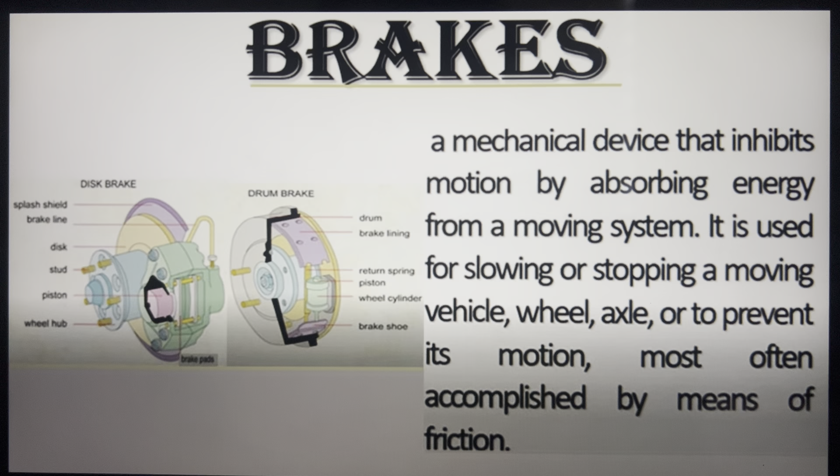Ang brakes po ay mechanical device that absorbs the energy from a moving system. It slows or stops the moving, it can be the wheel, the vehicle, to prevent the motion. Brakes are under friction po. So maraming uri ng brakes, we have the differential, we have the band brake.

Okay, pero for today, mag-solve po tayo ng problem about the band brake. Sa brakes po, concept-wise, sa band brakes, purely mechanics po yung solution natin. So kailangan lang po ma-drawing muna natin to.

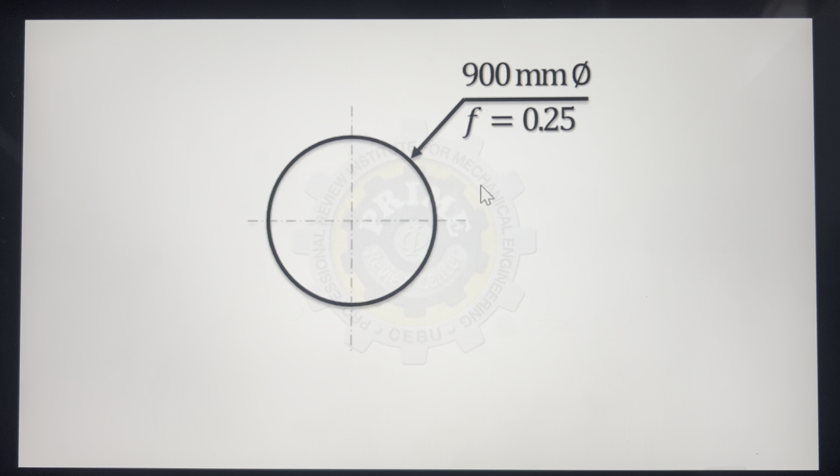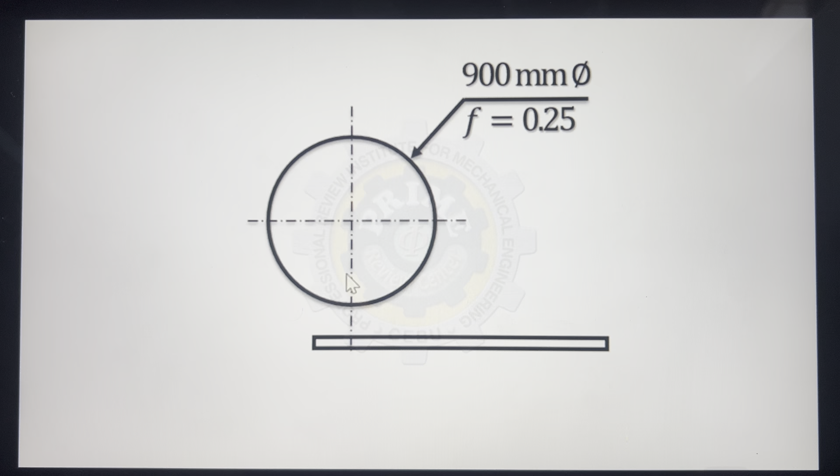Okay, kailangan po natin drawing, no? So, you have your band brake, sabi 900 millimeters diameter, and coefficient of friction is 0.25. Sabi, there is a straight brake arm, placed daw siya perpendicular to a diameter. So, ito yung diameter na pinili natin. It should be perpendicular. And this diameter daw is bisecting the angle of contact. Perpendicular and bisecting. So, hinati niya sa dalawa yung angle of contact.

So, alam natin, ang mga band brake, pag yan po ay bibitaw sa drum, naka-perpendicular po yan. So, the angle of contact, sabi, is 1.5 pi radian. So, if you convert that into degrees, that is 270 degrees.

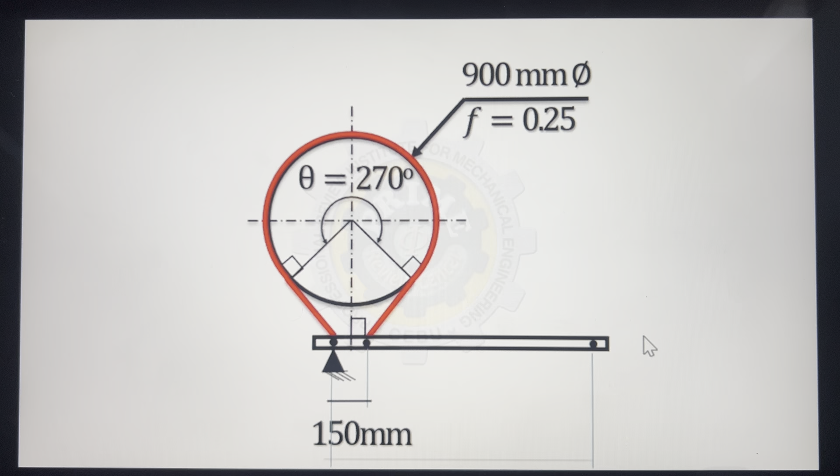Okay, bago po bumitaw ang brake sa ating drum, naka-perpendicular po yan. Okay, so sabi, one is fastened to the fixed end and the other is at 150 millimeters from the fixed end. And of course, nandito yung ating force, which is 1,000 millimeters yung haba ng straight brake arm. Dito mo po yan itutulak pababa.

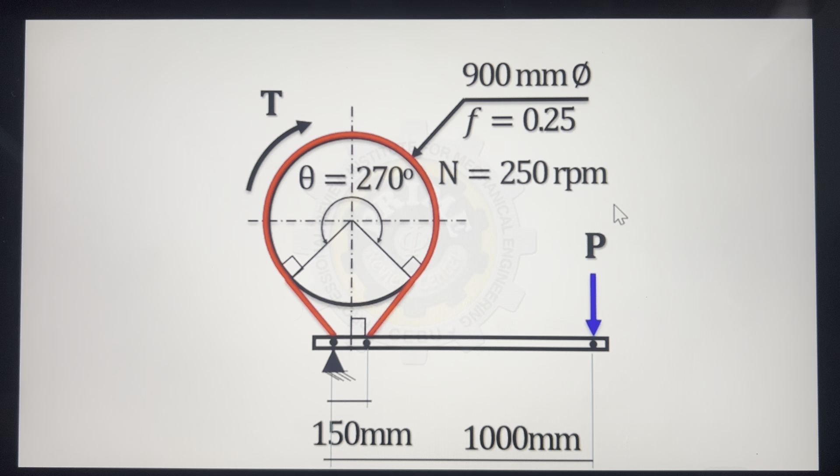So imagine, pag pinulot mo yung pababa, pupulupot yung band sa drum, titigil yung drum. So, assuming that the drum is rotating, wala kasing sinabi, so let's assume it is rotating clockwise, having a speed of 250 RPM, you're asked to solve for the force required. Tawagin natin P. Note, kailangan may power. So, ang power natin, hindi na ibigay, pero it should be 50 kilowatts.

Okay, may power po yan, hindi lang na i-type, 50 kilowatts. So now, after drawing this setup, mabilis-bilis na po yan. Sabi ko, the solution under brake is purely mechanics. So, una, katay-katayin muna natin. By the way, kung papansinin natin tong gitna, so if this is 270, since yan ay 1 revolution, 360, ang matitira po ay 90.

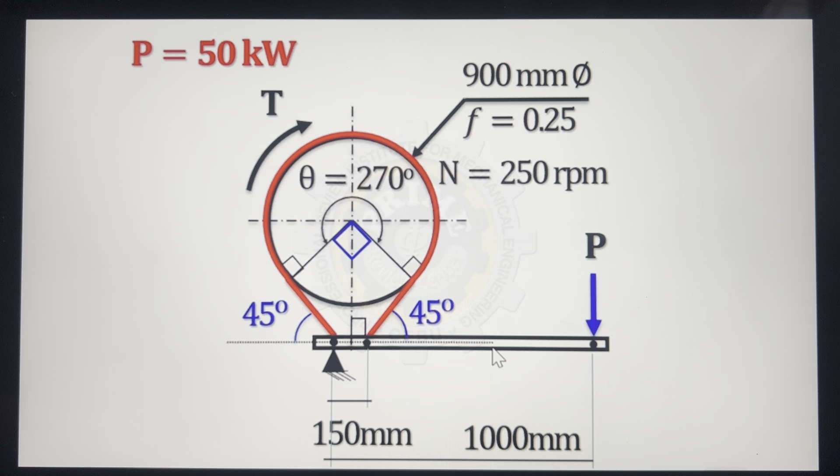Okay, so 90 yan. Take note, 90 to, meaning to say, ang dalawang gilid na ito ay tig 45 degrees. So, yan po yan, yung angle ng ating band brake with respect to the brake arm. Okay, so now, kakatay-katayin ko, free body diagram muna tayo ng drum.

This is the drum, this is the brake. Of course, kung ginawa natin siyang rotation is clockwise, yung nahihila po, that is your tight side, yun yung mahigpit, that is F1. Tapos yung bumibitaw is your slack side, yung maluwag, that is F2.

Okay, so now, if I take the summation of moment sa gitna, it should be 0 to maintain equilibrium. So lahat ng clockwise equals to counterclockwise. Clockwise na nakikita mo dyan is of course F2. Pag umikot siya with respect sa gitna, clockwise, having a perpendicular distance of radius, so that is diameter of the drum over 2. May clockwise pa po ba? Of course, the torque. Okay, Varignon's theorem, same yan ang effect sa gitna. So, plus torque.

And equal yan sa counterclockwise, which is F1 multiplied by the moment arm perpendicular distance, which happens to be the radius also, so diameter over 2. So pag sinimplify po natin yan, ito po lagi ang equation 1 sa band brake. Equation 1 for band brake is always F1 minus F2, that is the net belt pull or band pull, equals to twice of the torque over the diameter of the drum.

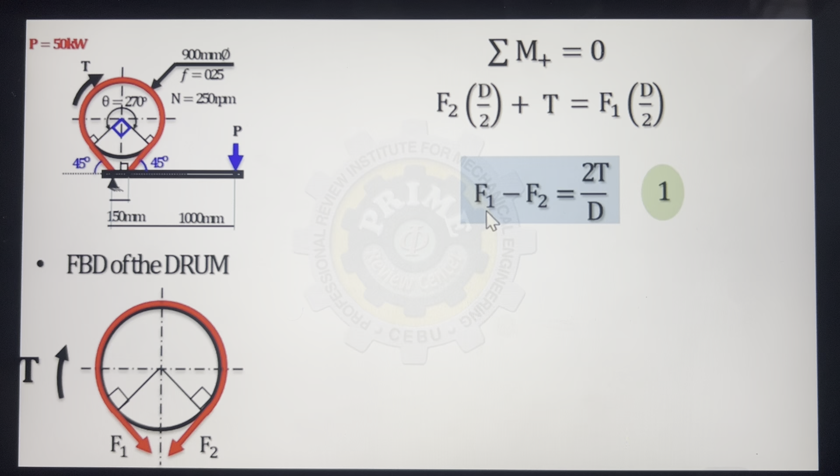Okay, so dalawa yung unknown mo dyan. You have F1 and F2. Yung torque mo, makukuha mo sa formula natin sa strength na power is Tn over factor. So kung kukunin natin yan, sa calcu natin, check lang natin.

So your power is 50 kilowatts. That is, SI is equal to torque. Gawin nating X kasi unknown. X, Tn, your N is RPM, 250. Kung naalala pa natin, ang factor natin sa SI ay 9.549 times 10 to the 6. Shift solve ka lang.

Okay, na-complex pala tayo, no? Ulitin ko lang. So, that is power, 50 kilowatts is equivalent to X, ang ating torque, unknown, times angular speed of 250, divided by factor of 9.549 times 10 to the 6. Shift solve for X, makukuha mo na 1,909,800 Newton millimeter po ang default ng ating torque sa SI.

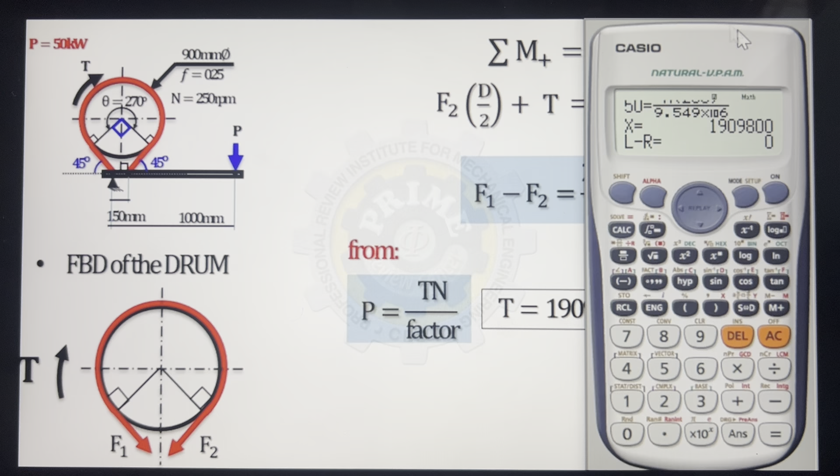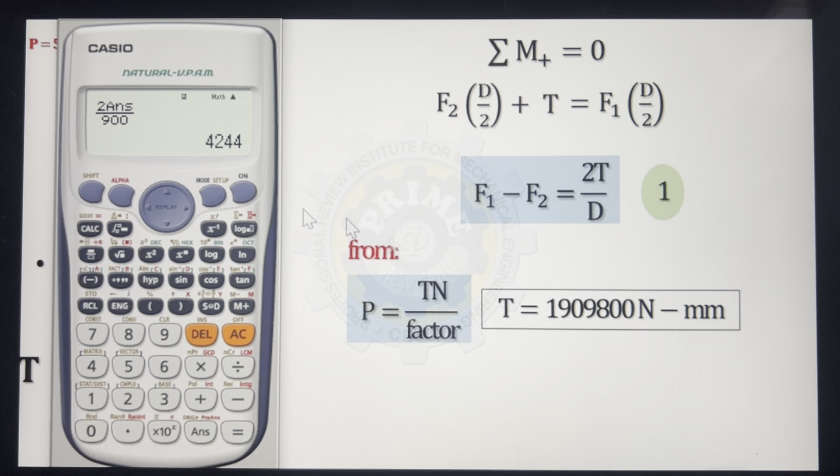Okay? So now, isa-substitute mo dito, makukuha natin ang ating value ng F1 minus F2, that is twice of the torque, which is nasa answer pa ng calcu, over diameter of the drum given to be 900 mm, ang matitira pong unit dun ay Newton. 4244. So, your equation 1 is F1 minus F2 is 4244 newtons.

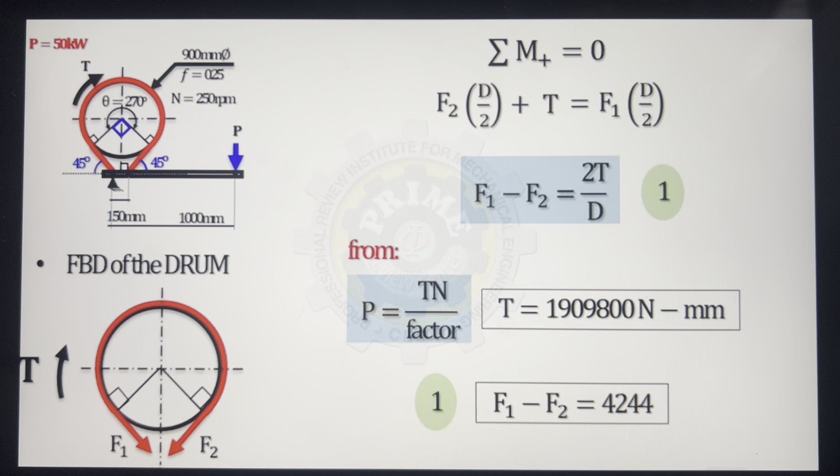Okay? So, dalawa yung unknowns. You have F1, you have F2. So, we need one more equation. Sa band brake, tandaan, ito lagi ang equation 1. Ang equation 2 natin, laging kukunin sa belt tension ratio na tinuro sa strength of materials, na F1 over F2, tight over slack, is equal to E raised to F theta. Coefficient of friction, theta is in radian.

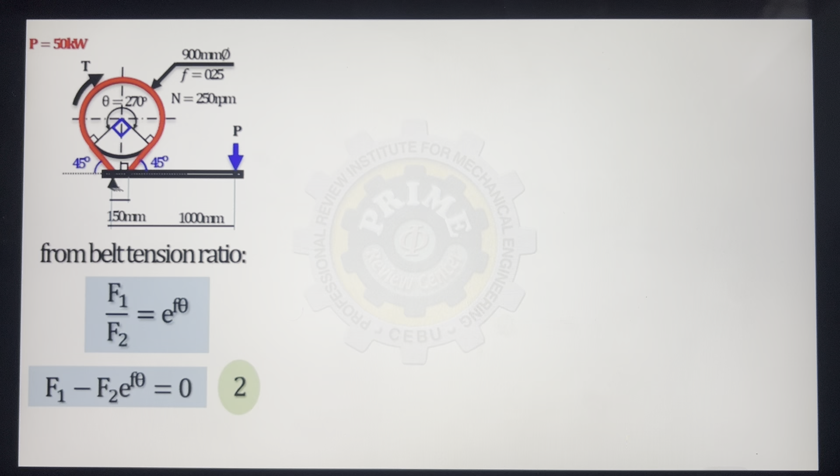Okay? So, cross-multiply mo lang. Cross-multiply doon, then transpose, magiging F1 minus F2 times E raised to F theta is equal to 0. Equation 2 yan. So, substitute na lang natin. Labas ko ulit si calcu kung saan galing yung coefficient ng F2.

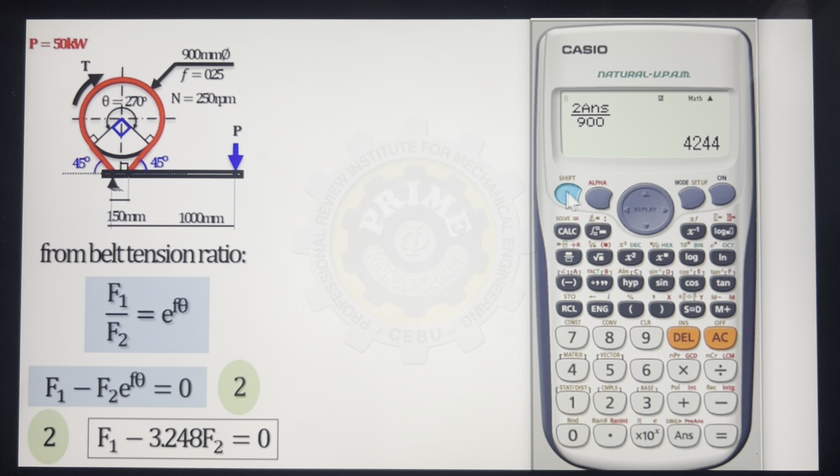So, that is E raised to F, which is 0.25. And theta in radian dapat is, sabi doon ay 1.5 pi. Okay? Equals mo 3.248. Okay? Doon po galing.

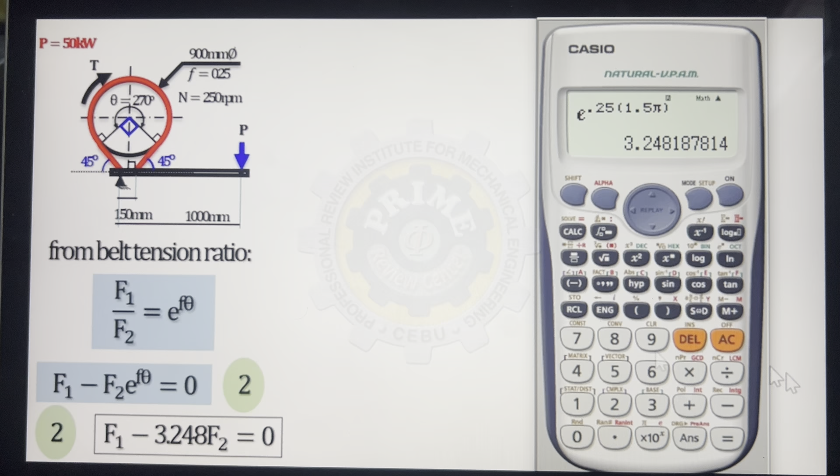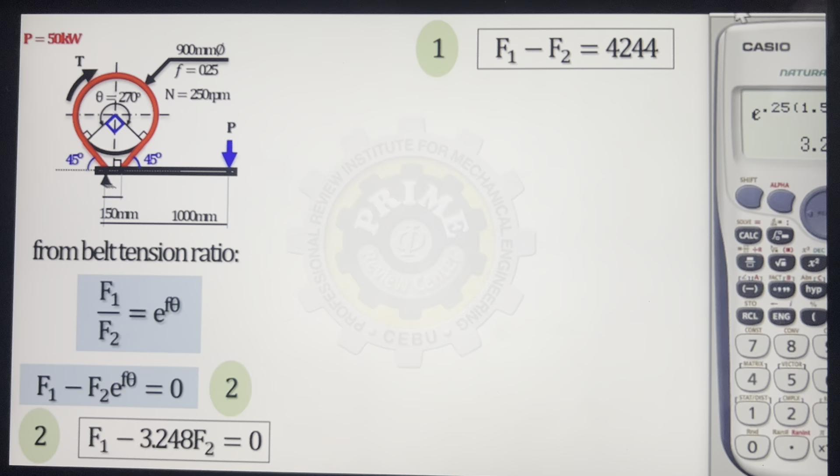So, now, solving equation 1 and equation 2 simultaneously, sa calcu po natin yon. Okay, labas ko lang ulit. Sa calcu natin, lagay lang natin ay mode. Two equations, two unknowns is 5, 1. So, ang ating equation na ay 1, negative 1, and ilan nga ba yun? 4, 2, 4, 4. Equals mo.

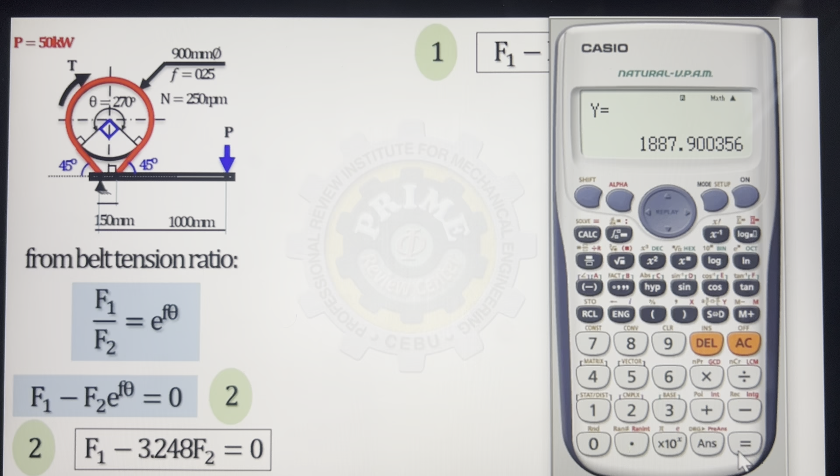Yung isa ay 1, negative 3.248 equals, and then 0. So, lalabas po F1 6132 approximately, and F2 is 1888. Yan po ang values ng F1 and F2.

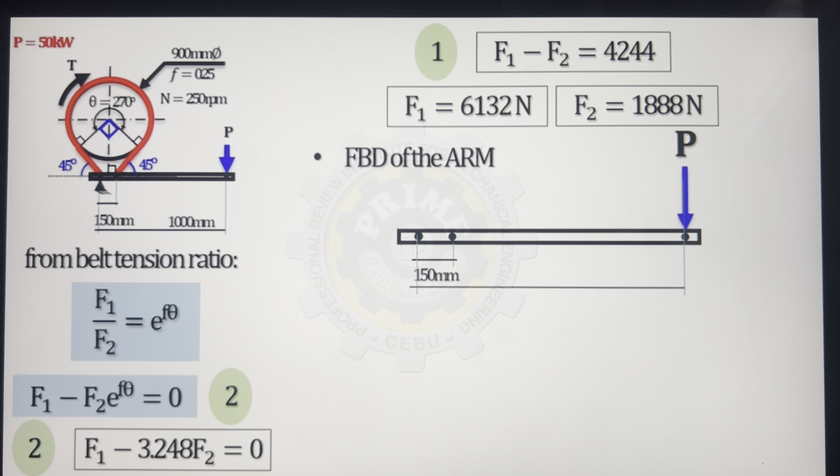Pero sa problem natin, hindi yun ang tinatanong. Ang tinatanong ay force P. So now, analyze natin ang free body diagram ng arm. So you have the two ends 150 millimeters apart, and you have your force P 1000 millimeters from the fixed end. So this is your F1 and this is your F2. Lagi po natin gagamitin references yung fixed, which is at F1. So tatawagin ko yung point O. Then we take the summation of moment at point O to be 0.

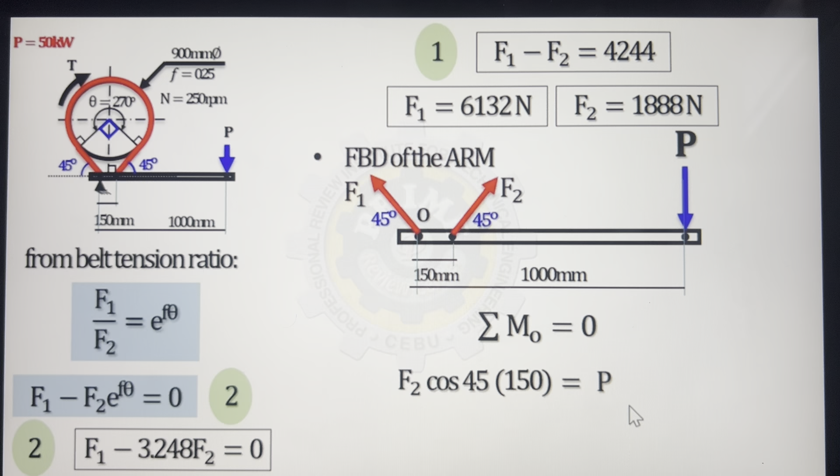So syempre, hatiin mo sa component sa F2, hindi na magkakaroon ng moment effect ang kanyang X component, which is the sine of 45. Ang meron lang ay ang Y component, which is F2 cosine 45, perpendicular distance is 150. Ang kukontrahin niya lang ay nag-iisang force P, which is the unknown, times, of course, the perpendicular distance 1,000. Okay? So, pipindutin ko na lang yan dito.

Okay, so now, ita-type na lang natin yan sa calcu, no? So, F2 is 1888 cosine 45, times 150 is equivalent to x times 1,000, okay? So, x is your unknown value of force P. Shift, solve na lang.

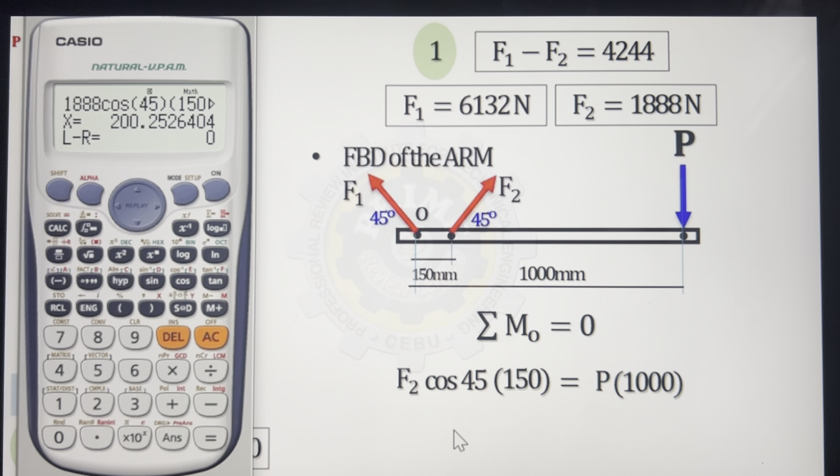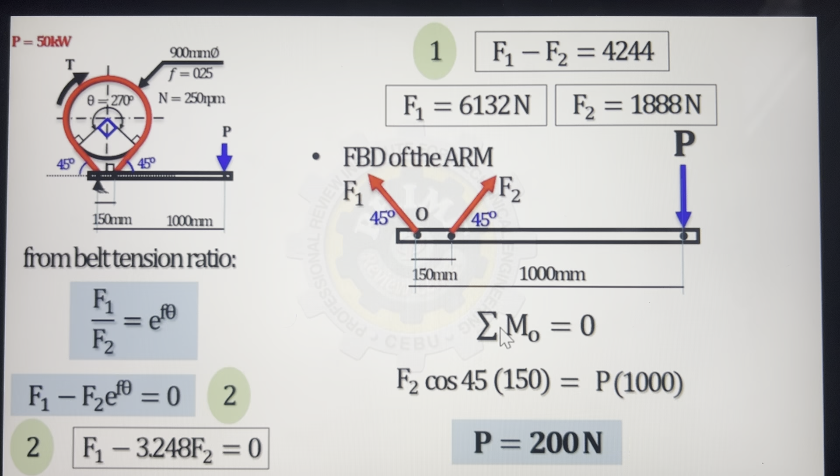Okay, so, okay, naka-radian pala tayo. So, palitan ko lang yung radian. Gawin nating degree. That is number 3. Okay, then shift. Solve ulit tayo. Makukuha mo ang 200.25. So, roughly po, ang sagot natin for the problem is 200. Okay, at least 200 para po mapatigil natin yung ating drum. Okay, so, yan po yung solution. Hopefully, naintindihan. Okay, sige, next po tayo.